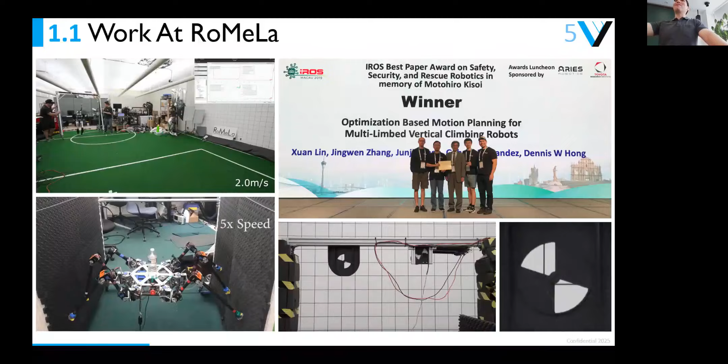The lab also, I guess if this goes, this is like the modular robot that we designed and created that can latch and unlatch and move across different places to do pick and place. Then there's a classic picture with me and Aaron winning Best Paper Award at IROS way back in the day with Shren, or I don't know if Shren's listening, but he's probably online somewhere.

So now I'm doing a startup with a couple of guys. We're still sort of figuring things out. We plan to be in multiple places, maybe China. We'll see, I think that's in future works.

But yeah, let's kind of move away from introductions and get into the meat of things. So RoboCup, if not a lot of people know, I feel like this audience knows, but maybe some people online might not know, it's an international competition where essentially robots play soccer against each other autonomously.

I think the goal is to beat the FIFA World Cup champions by 2050, a game against humans and robots. But it's also expanded to a lot of different areas, for search and rescue, at-home, industrial and logistics. I believe China has its own league of a lot of different other categories now, so it's a very quick and expanding area.

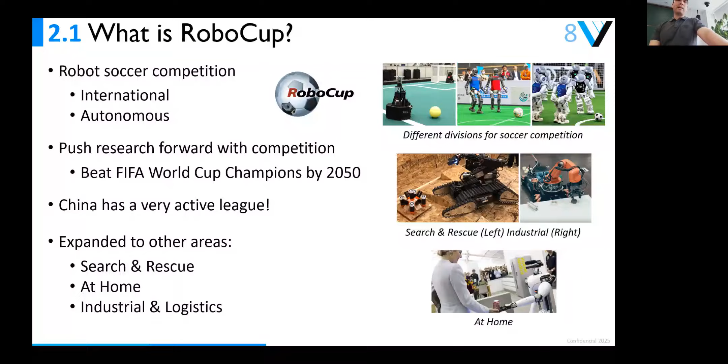Just to give you some reference, this was pretty much a 3-year project, and we didn't start off winning or at the very top. We actually worked our way up from the first year scoring 0 goals, second year scoring 2, and then the third year scoring 67. So for all of you thinking that it's a one-time thing, it's a long process for a lot of these things to come to fruition.

And to give encouragement to those who have struggled with this stuff: some of the highlights for our particular system include the fastest speed at that time, probably the strongest kick, and even the most accurate, I would say. We'll watch a few videos of that, and a very robust localization on top of all the other pieces that go along.

So we played with Artemis, one of our lab's premier robots. It stands for Advanced Robotic Technology with Enhanced Mobility and Improved Stability. One of its features is that it was specifically designed for soccer, for this competition. My senior who designed the robot was very passionate about RoboCup.

So a lot of it is designed to move quickly, to have a wide range of motion, and to have compliance, because I think you do need that for this type of robot. It's just very fast and capable. We're nowhere close to reaching its full capabilities, but yeah.

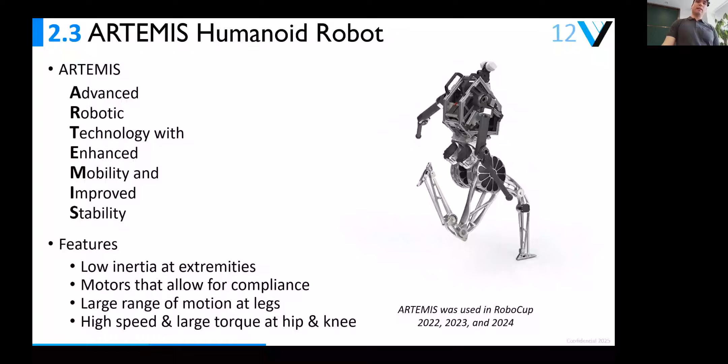So from the waist down, that robot was basically all custom built, including the motors themselves. We use quasi-direct drive actuators with a low gear ratio. This allows for the main thing I'd say, speed and compliance, while still maintaining some level of torque, being able to have high control bandwidth and basically high torque transparency, meaning you can use current to estimate your torque.

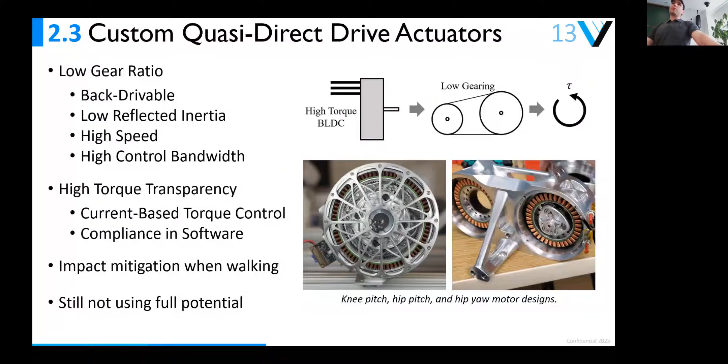These are all very useful things, and I think later on we'll get into why that specifically might help with something like our model-based approach for walking, running, or kicking. So just to give you an idea for high control bandwidth, this is a very early test of the motor moving back and forth.

Since we're short on time, I'll just start the other video. Impact mitigation, right? If you're walking or running, you need to be able to absorb your weight as the robot is taking steps.

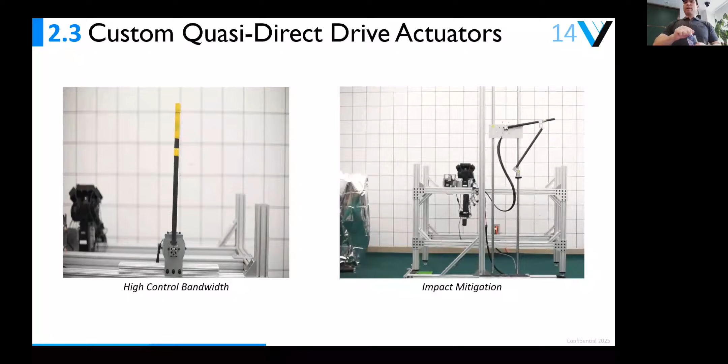So in the lower body configuration, we have 5 degrees of freedom with a 45-degree hip design to distribute the load between the hip roll and yaw. And the image down below is a demonstration of the wide ranging motions that it can do.

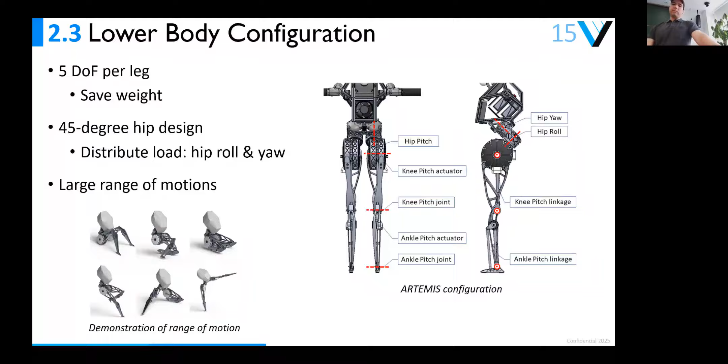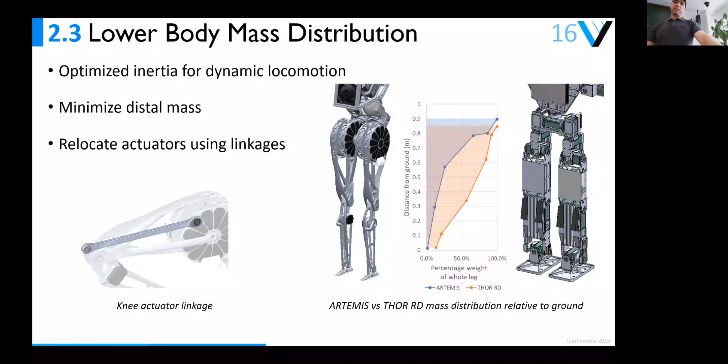In terms of a design heuristic, we're trying to move all the mass up to the center of the body and keep the lower body as light as possible. We'll get into, very briefly, the linear inverted pendulum and trying to design that for our humanoid, such that the overall design is consistent with the modeling and control we're trying to use for this particular robot.

We additionally had a foot design because, I don't know if you can see my mouse, maybe not, the little wings on the side, we wanted to increase the area in which we can kick the ball. Otherwise our feet were too thin, and having thin feet means smaller contact and a higher chance of missing or whiffing the ball.

So we increased it, but the reason it looks a little funny is because in competition, other robots will be stepping on your foot. So this essentially folds down, angles down, so other opponents would roll off. It's flexible in one direction and not flexible in the other.

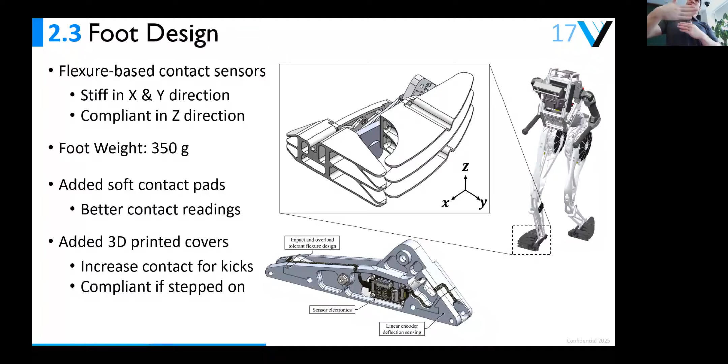Overall, Artemis has 20 degrees of freedom. It weighs 37 kilograms, so relatively on the light side, and its height is 1.42 meters. Again, completely custom from the lower waist down.

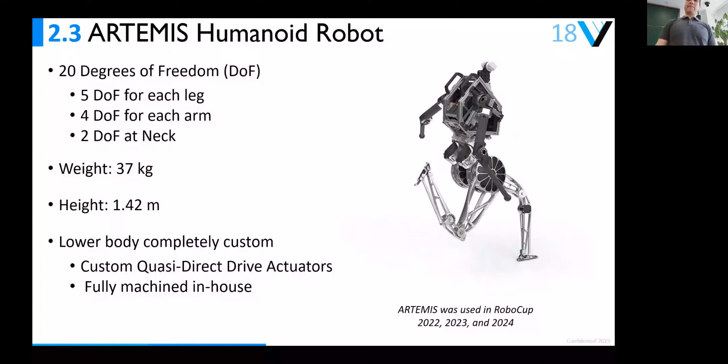Sorry, I'm speeding through this because there's a lot of material I want to get through, but feel free to pause me if you want. We talked a little bit about the hardware; we'll talk a little more about the software and give an overview.

I think for a lot of cases, the one thing missing from a lot of architectures is this proximity component. Essentially, we have vision and use machine learning to determine features in the field, but when this fails, proximity comes in. So anything too close, it'll detect that there's an anomaly in front of me, maybe a robot, maybe a person, I don't know. But being able to catch those cases is something I think a lot of people failed to incorporate in the competition.

One of the running heuristics in how we designed things is that for a lot of the lower level control, we tried to have it at a much higher frequency. As we got up the planner, we had a lower level control for locomotion, a mid-level control for trajectory planning, and a high-level goal for stating the desired final goal or state you wanted to be at. Each one of these ran at different frequencies, with the lowest level control running the fastest, mid-level second fastest, and high-level quite slow.

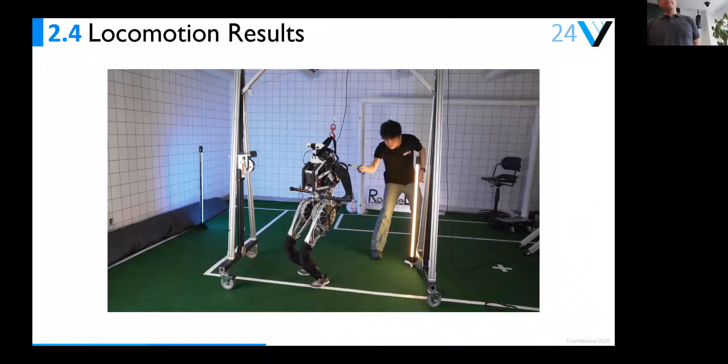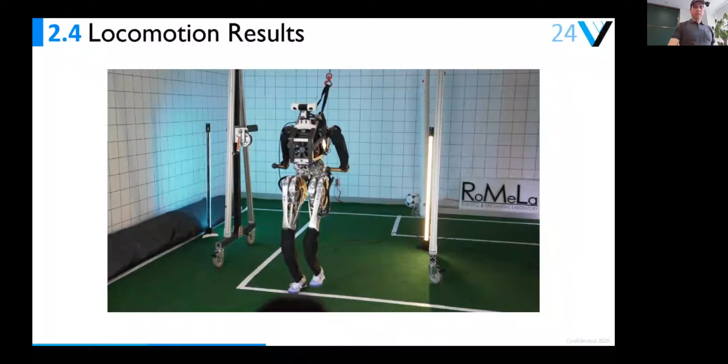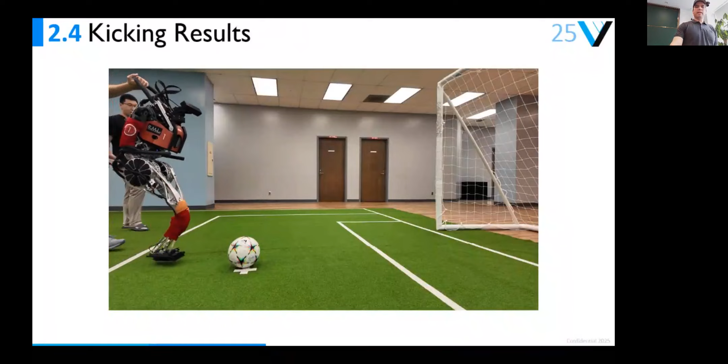So this is a little bit of just the robustness, and this is the kick. Not bad, not bad.

So we're gonna step through each component - I'll try and get through this quickly. Vision: we basically had feature detections on the field, looking for specific landmarks, whether that be crosses on the field, corners on the field, any sort of T-shape marking on the field, and we'd use this for localization and other things. It would also detect robots and opponents from the RGB frames. That was the vision side of things.

Earlier I mentioned proximity, where it would catch every time vision would fail. In this case, we only use the depth information for proximity - this is assuming that I cannot detect that there's an opponent in front of me, maybe the opponent is occluded, maybe I only catch half of its arm, but that would raise a flag that there's an anomaly specifically in this area. That would allow our overall detection rate to be a lot higher than what you would normally get in these competitions.

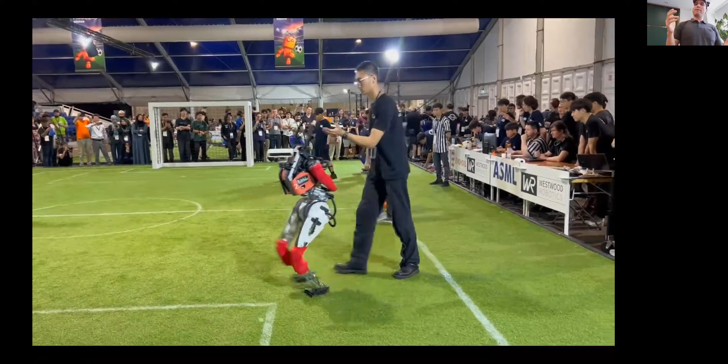This is one of my favorite clips - I'll go back and explain things in more detail. You can see that girl, how impressed she is on the slide. Let me replay this.

One of the impressive things here is how fast I turn and then how fast I kick - how fast I'm going to the ball. If you count it out, one-one-thousand, two-one-thousand, three-one-thousand, that's how fast it takes to kick. Let me pause right here.

I'm taking a kick from half the field with an open goal, actually aiming toward the center. If you look at this shot - to turn that fast, hit the shot, and have the ball end up right there - you need to be pretty accurate, and your entire system needs to run a lot faster than I think most systems today. That's what I found really impressive about this specific shot.

This next one shows a more complicated behavior than you'd expect. It detects a robot in front, pauses and waits. The other robot goes around, but our robot comes in underneath and kicks the ball to create space - again with a very quick kicking time. It doesn't take a lot of time to think, where I think a lot of other robots take their time to get that accuracy too. I think this is Aaron's favorite clip, and mine too.

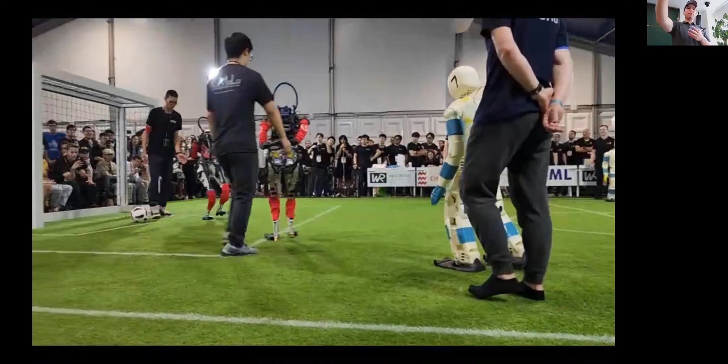We had a bug during the competition where it would go to the old position of the ball, so we'd overshoot and almost score on ourselves. You have to imagine there are four or five different people in the goal, and it's still able to clear the ball out pretty quickly. These are some of the biggest highlights - going from something very simple to reaching this point was very impressive.

And then we won, and people were very relieved. It was a lot of pressure, and it's nice to see everything pay off. That's us - that's part of the talk.

We can go through a bit more depending on time, and see how people feel. I'm going to start talking about localization and that part of the problem, and then how we generalized that into something a little bigger. I don't know if people have questions before I move on - if not, I'll continue and we can take more questions toward the end.

So, CLAP localization. On the surface this is a very simple approach - simple doesn't necessarily mean bad or less powerful, but it is very simple on the surface. As a matter of fact, so simple that some reviewers for the first paper said this is too simple. Anyway, let's get started.

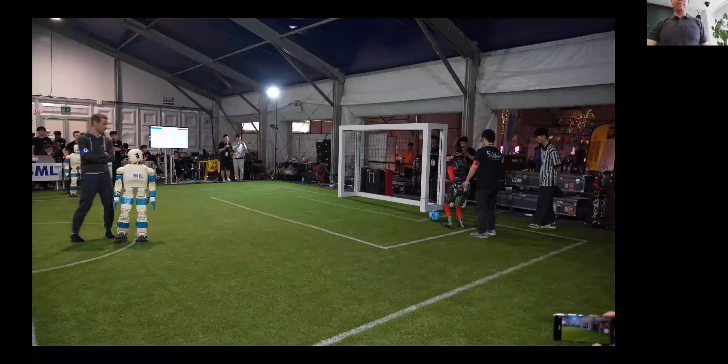But even taking a shot like this is really hard for robots from that angle with the right side of your foot. And in my opinion, that has to do—oh, we saw this localization.

But a lot of people said, okay, great, you've created a technique for basically a toy problem, right? This doesn't work in 3D, or how are you gonna do this? What is the point? It's great that it works in RoboCup, but how can I use it elsewhere, right?

So I think with a little bit more time and thought, we actually realized that it was very similar to a few other algorithms, and not necessarily within robotics itself, but in image processing, specifically when we're talking about RANSAC and Hough transforms. These are algorithms, RANSAC in particular, widely used to reject noise or reject outliers.

I'll cover this again, but what CLAP does is it basically looks at your output and tries to do matching with other points on your output, given a subset. We'll talk about this more, I just want to give a quick overview. Whereas RANSAC is trying to find a model, and it looks at your input to check whether your model is correct or not. Then Hough transform is trying to find a model, but it uses your model parameters to check whether you're correct or not.